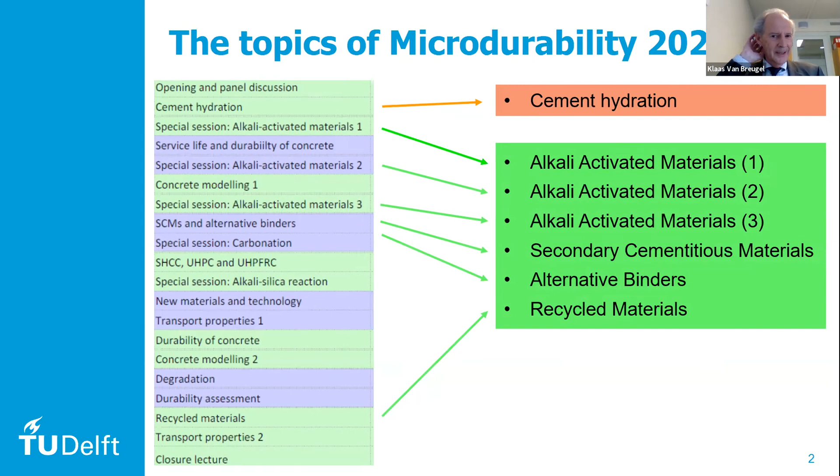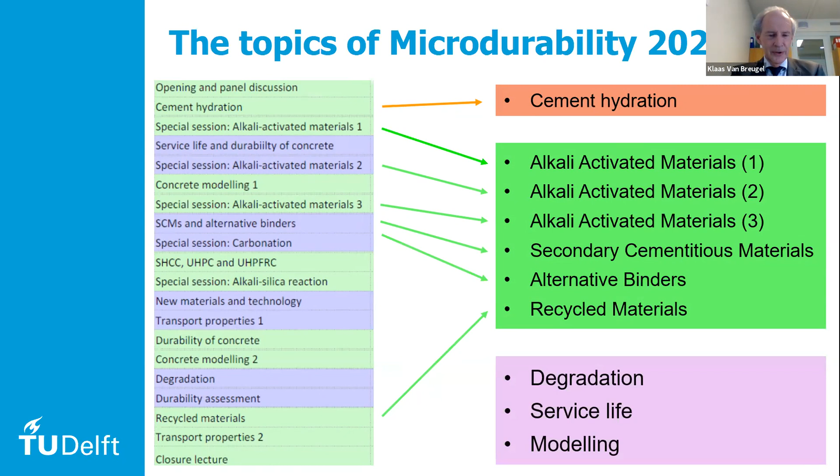I will share some of my thoughts with you, and I hope it will be of meaning for you. Indeed, it's a question: why cement-based materials could make the difference? If I look at the topics of this conference, I have a list of the different sessions, and there is actually only one speaking about cement hydration. Then I see a lot on alkali activated materials, secondary cementitious materials, alternative binders, and recycled materials, and some stuff on degradation, service life, and modeling. So the question is whether there is really some future for cement-based materials, because all the emphasis is on other stuff.

But still, I ask the question: where are we going? Where are we going with all our building materials? I think a realistic speculation about the future should be based on a realistic evaluation of the past. And what did we see when we looked to the past?

Well, the structural materials we used in the past were mud and clay, and they were plentifully available in big quantities. Then we had wood, and another thing about wood is that it is renewable. And then we have, of course, natural stone.

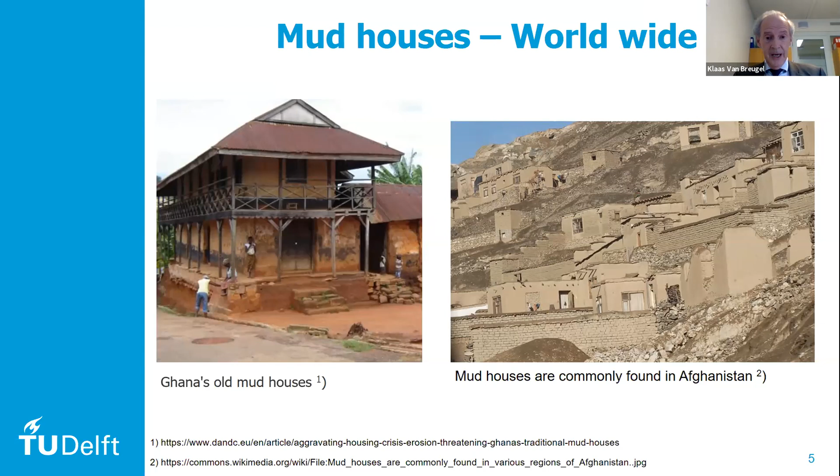Just some images of what has been built in mud, still today — not only houses, but also whole cities, in Afghanistan and also in Yemen and other places. You see many of these mud houses even today, but in the past, of course, even more.

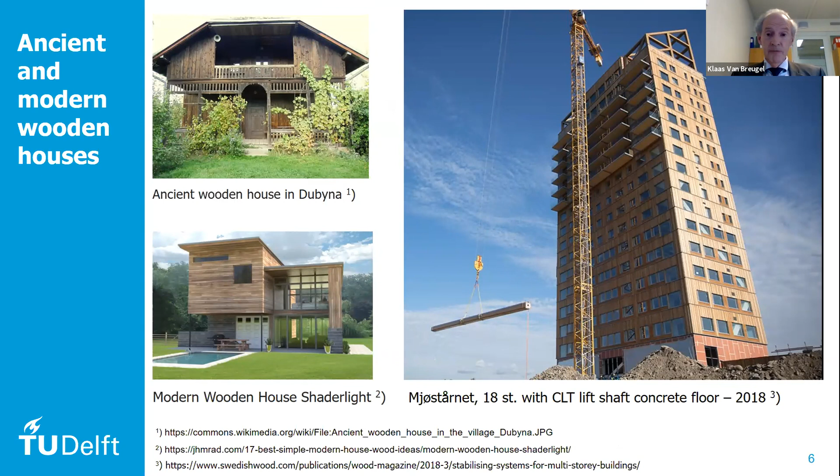Then we have wood, which has also been used for centuries. Very old classical buildings, but also modern buildings, and even multi-story buildings up to 16, 18 stories are built in wood. So wood is nice too.

And then natural stone, with some bridges over 800 years old and even older. So that's what has been possible with these materials.

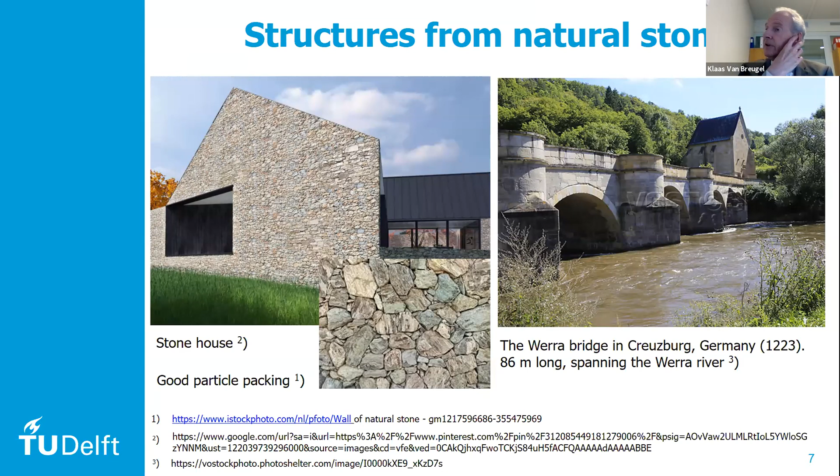And we can say, if we look back, that there was enough for everybody — enough building materials for everybody, and whatever we wanted to build, we could do it. There was enough to meet and realize people's needs and ambitions.

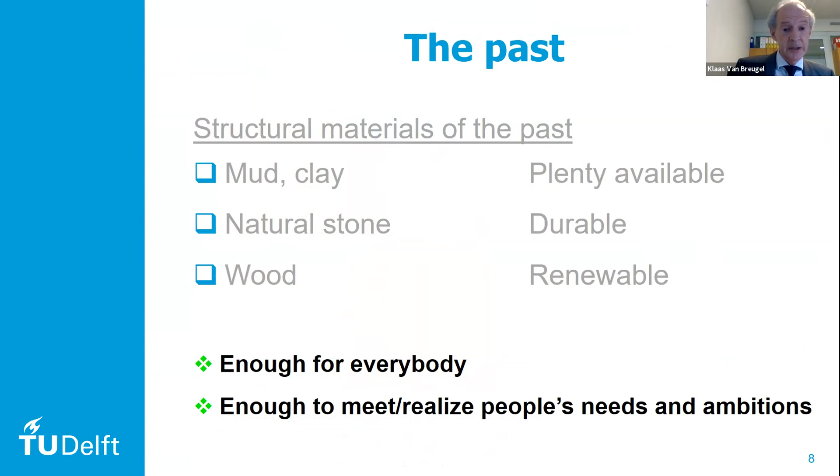But if we look to the future, and even not the far future but where we are today, we see an enormous growth of the population. And we have to wonder whether there is still enough building materials for all those people who want to have houses and to travel and so on.

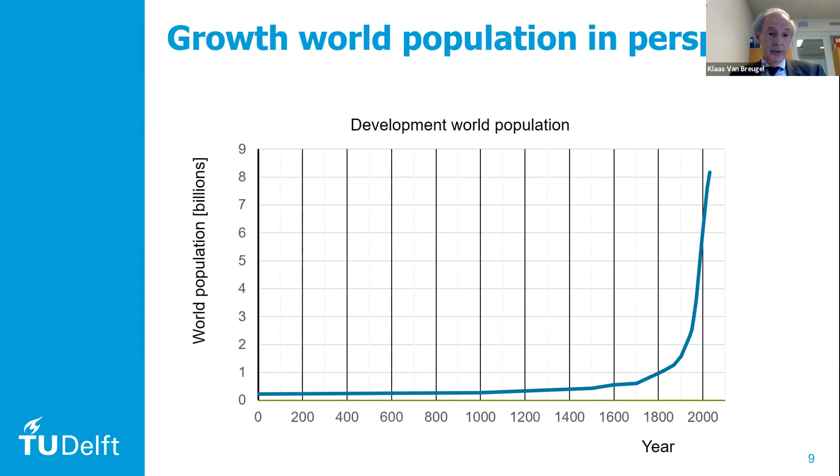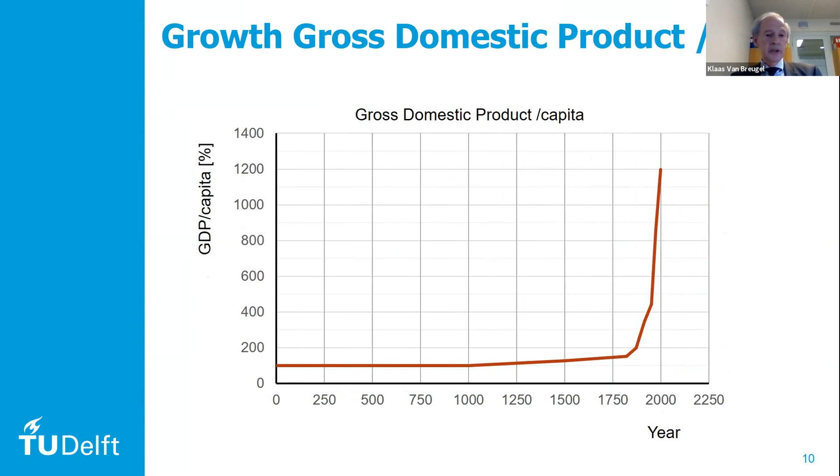It's not only the growth in population, but also the fact that each individual person needs more. There is an enormous increase in the gross domestic product per capita, as you see here. Together, these increases in demand for materials and energy from individuals and from population growth end up in an enormous increase in the world gross domestic product, as you see here.

It's enormous. There is no sign that this will decrease. The need of people, the demand for more materials and more energy, is going on — certainly when we realize that so many people on this planet are still looking forward to higher prosperity and a higher welfare level.

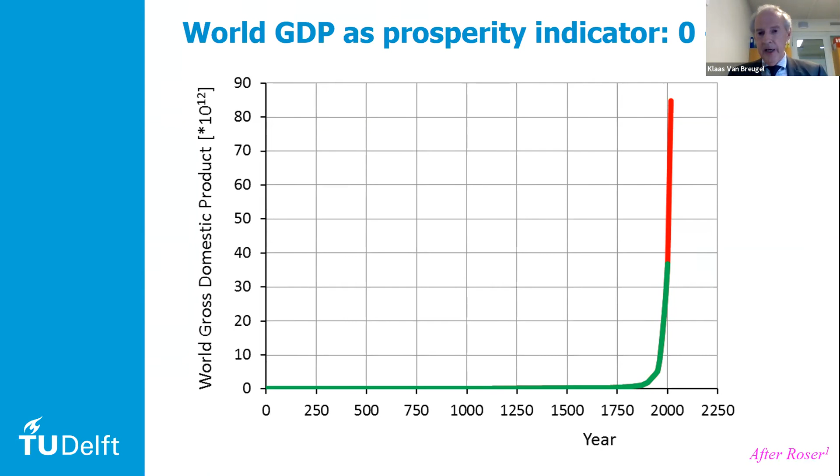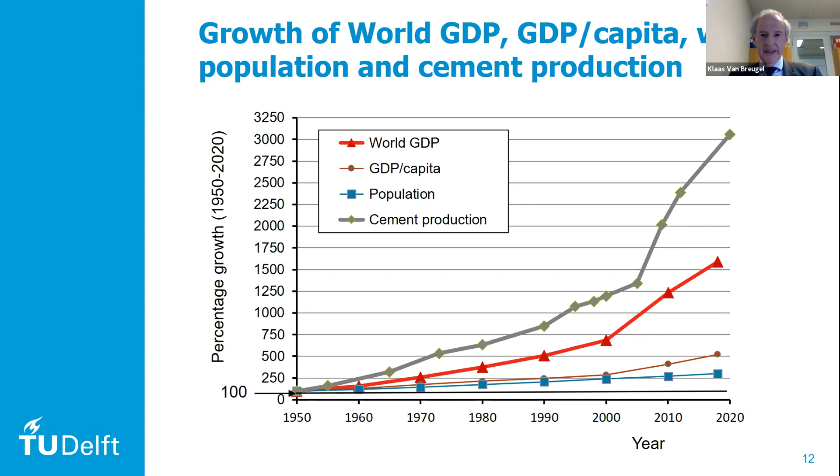Interestingly, this picture shows that cement has played an important role in this. If you look at the red curve, showing the increase in gross domestic product worldwide on a time scale from 1950 to 2020, the last 70 years, you see an enormous growth. The gray curve shows the growth in the amount of cement consumption, and the growth in cement consumption is even higher than the growth in gross domestic product. So we can fairly say that cement and concrete has played a big role in the increase in our present level of welfare and prosperity. The big cities you see here as an example, and also big infrastructure works, have all benefited and were possible because of the use of concrete and cement.

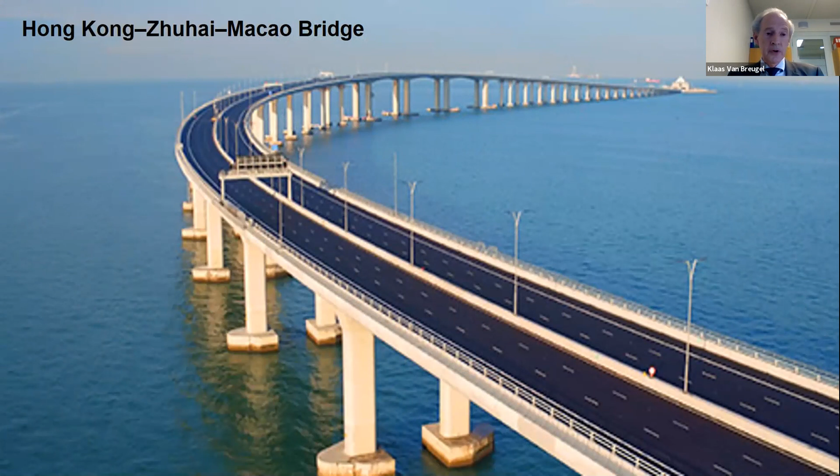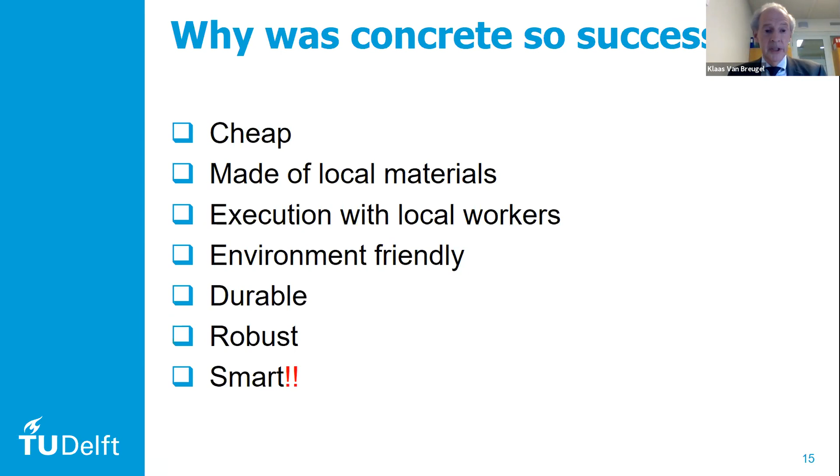And why was concrete so successful? Well, it was successful because it was cheap. It was made of local materials. It could be executed with local workers. It was environment friendly - well, there's some doubt about this CO2 stuff, of course, but it's still a nice material, not seriously polluting the environment. It's durable, it's robust, and above all, it is smart. I will deal with the smartness of the material more in this lecture.

But first, just to show a very nice example of an old structure made in concrete, a type of concrete at least: the well-known Pantheon, often mentioned as one of the precious design works of the past, structural works of the past.

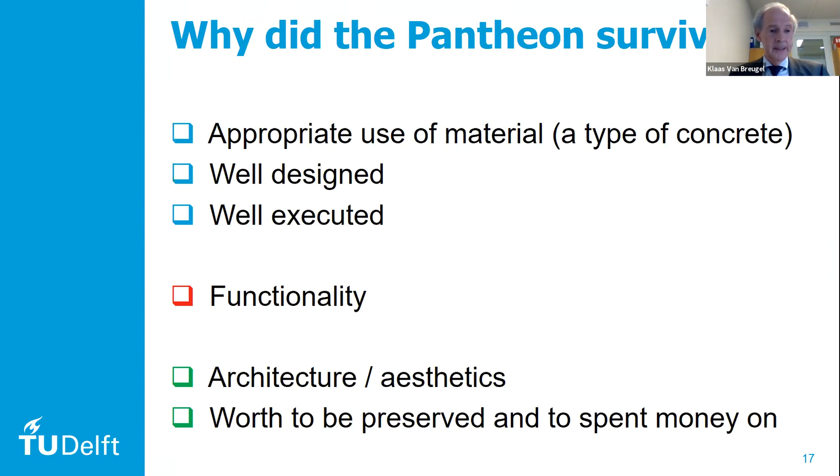And why did this Pantheon survive? Well, it was because of the appropriate use of the material, a cement-based system, kind of concrete. It was very nicely designed, well designed, and very well executed. But apart from that, it was also its functionality - that's also a reason why it is still there, and it's a very beautiful structure. Because it is functional and beautiful, it is also worth preserving and spending money on. So it's not only a materials issue, it is also the architecture of the whole thing that plays a role, and that is considered an important reason to preserve this beautiful structure.

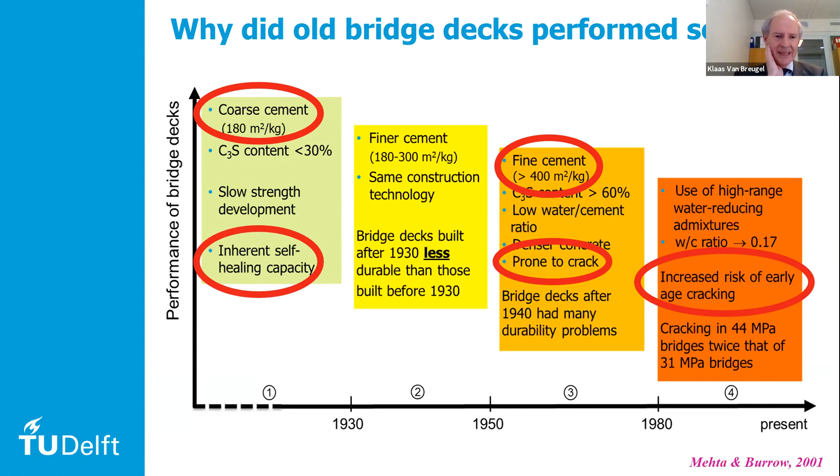If we look back to this first period, those old bridge decks that performed so well, we saw that they had a very good self-healing capacity. And that's one of the secrets, I think, of cement-based materials.

Let's go more in depth into the concrete and what happens when it is loaded. When it is loaded, you see here a piece of concrete loaded, and you see that cracks occur here. The load is transferred from one side of the sample to the other, and it causes cracks because it's a very heterogeneous material with all kinds of stresses in it, tensile stresses, and concrete will then crack. The load is transferred via the aggregates and via the cement paste, and the cracks - still the cracks are there.

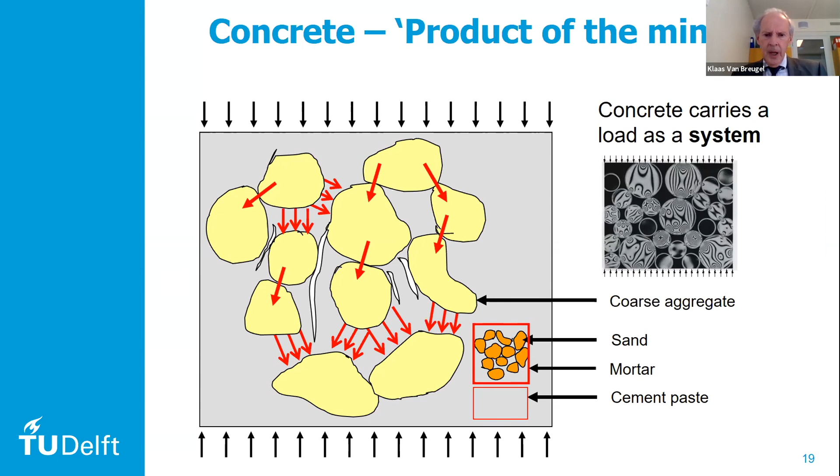How can these cracks occur? Where do they come from? Well, they come from an external load. They come from degradation mechanisms, or they come from an imposed deformation.

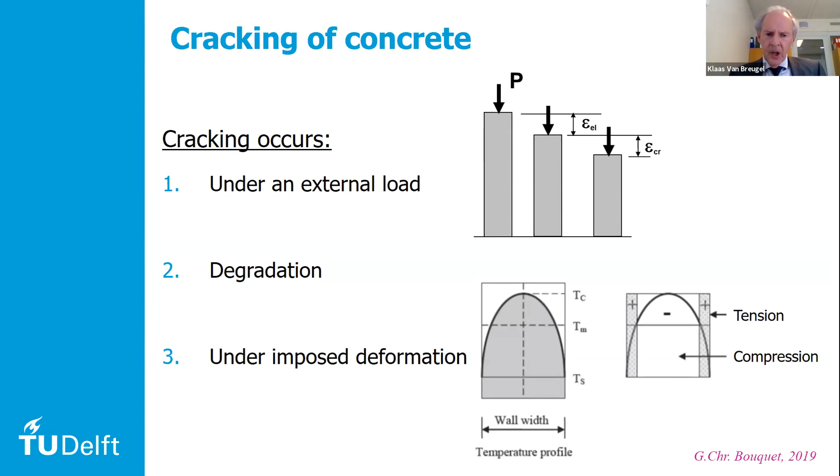Let's look at the first one, a piece of concrete under load. If you have this piece of concrete under load, it is actually a creep test. If you load this specimen, you see an increase of the strain, that is creep, and at a certain time there can be an acceleration of microcracking, and the structure fails.

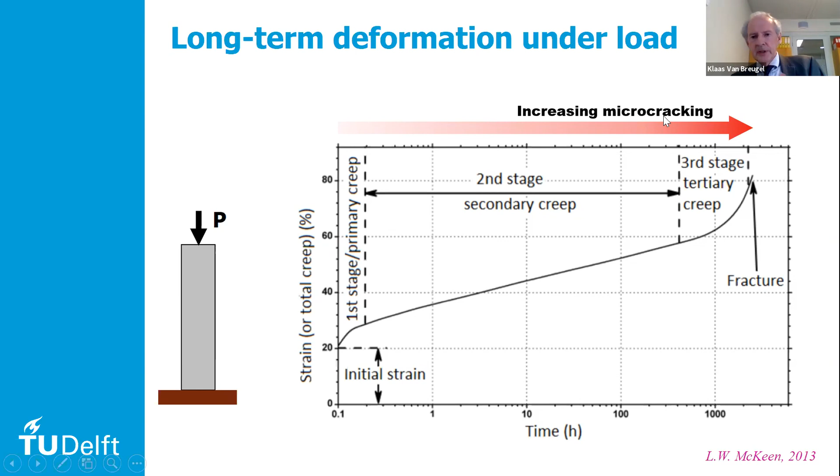So that's due to microcracking under a sustained loading. But we see also something else. Here you see the increased microcracking indicated, but we can also look to the strength, not to the deformation, but to the strength. And then you see that the strength will gradually increase with time due to hydration.

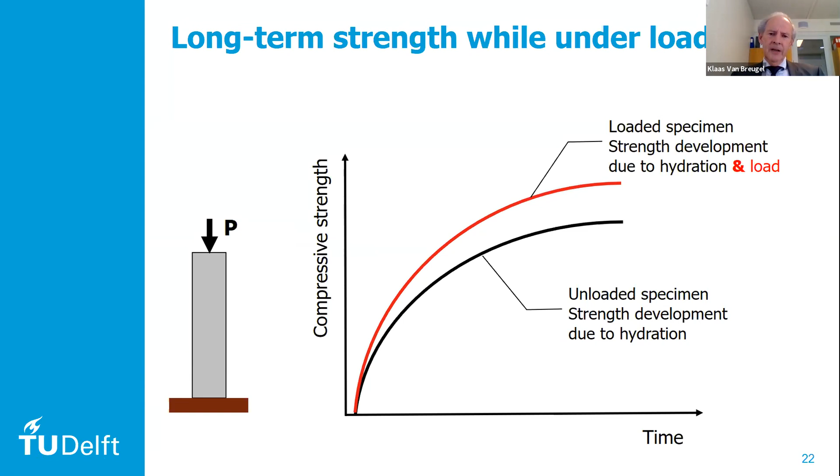But if it hydrates under load, as indicated here on the left cartoon, then you see that in the end the strength is higher. And that's interesting because in the previous picture, we saw that due to cracking, there was in the end failure, progressive failure, sudden failure at the end. And on the other hand, you see an increase in strength. That's very contradictory that a sample that would increase in strength would finally fail. That's a little bit strange, isn't it?

So we see that the ongoing microcracking results in increased microcracking, failure under load, or an increase of compressive strength—an increase of the compressive strength beyond the strength of a sample that was not loaded.

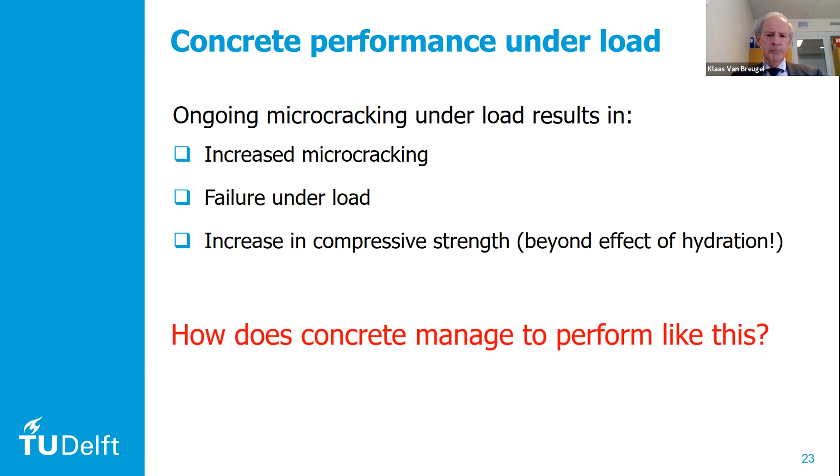So how does concrete manage to perform like this? Well, it is actually self-healing that does that.

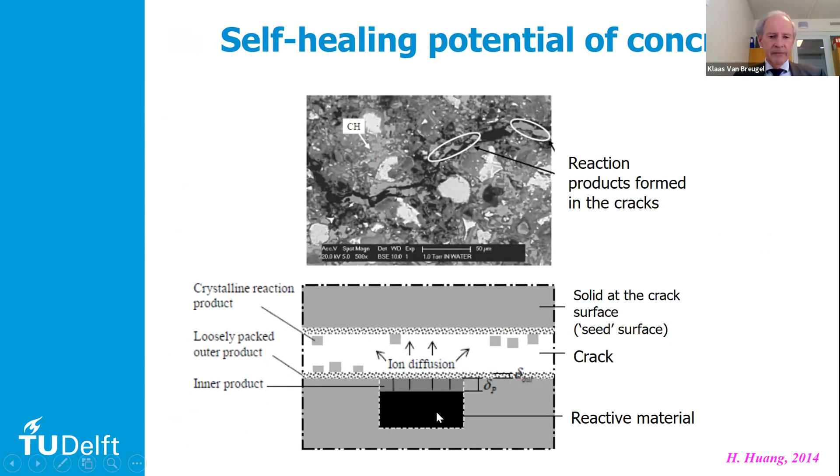The self-healing has been studied by one of our PhD students, Huang, and he has been looking in detail at what is happening in a crack, and he modeled the self-healing that could occur in a crack, that was supposed to occur in a crack.

An interesting thing in his research was that adjacent to a crack, he found that the cement paste was actually densifying due to additional hydration, a degree of hydration that was higher than in the bulk cement paste, a little bit farther away from the crack surface.

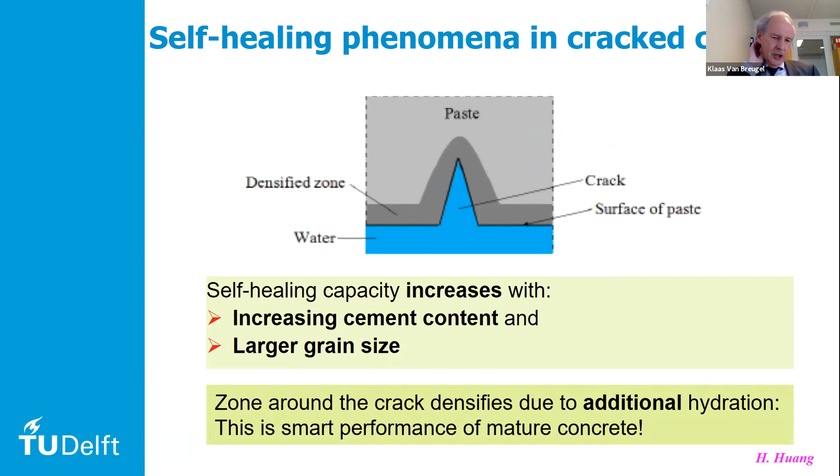Suppose now that this is something that happens always, that close to a crack you have some extra hydration, and we looked at a sample where you have multiple cracking. When a crack occurs, you see a little bit of extra hydration, and another crack, a little bit of extra hydration, and so on and so on.

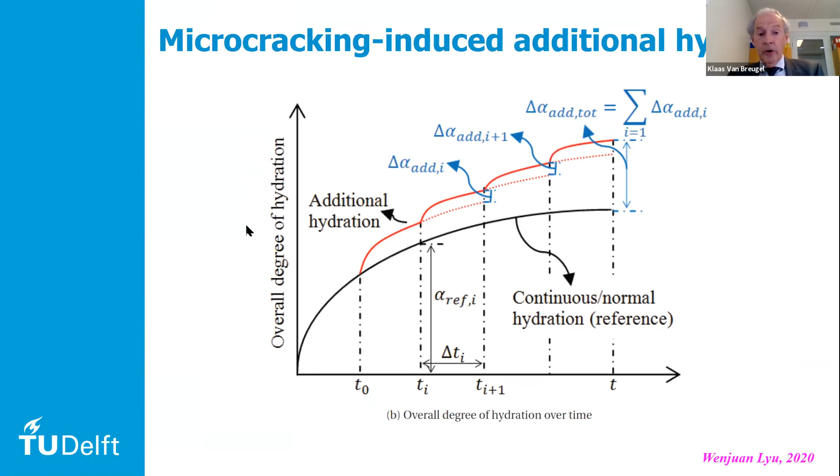So then it might become stronger. We know that there is a good relationship between the degree of hydration alpha and the strength. And if there is extra hydration, then you can expect there will be extra strength.

If not, in the end, the sample will not fail due to this—when you have a very high load level, you may have this progressive collapse as we have seen in the previous one. But at a moderate load level, this might then happen, that you have an increase in strength.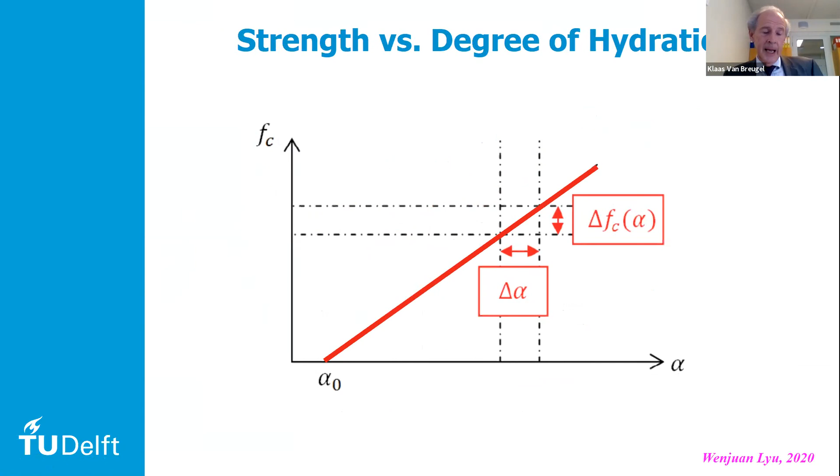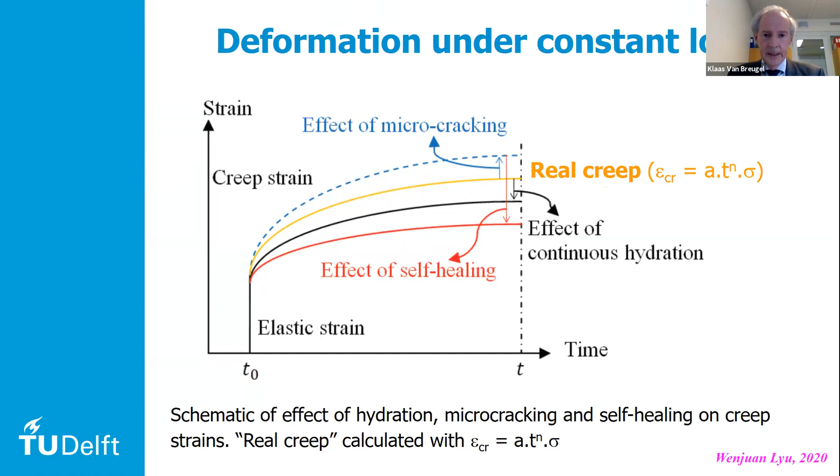So it would be interesting to see whether it works like that and if we can model that. Well, that has been the work of Wenjuan Lyu. She did a study a few years ago. She said, okay, I have here the concrete, on the mesostructure of the concrete.

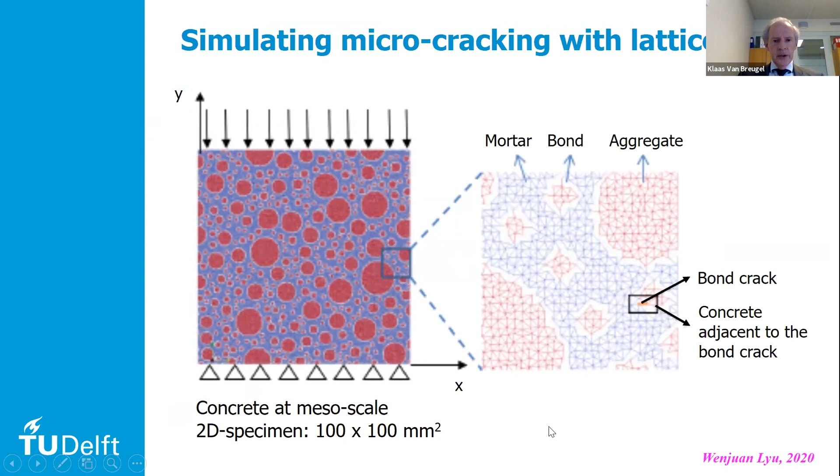I simulate the performance with a lattice model, and I assign to the cement paste the possibility to crack, but also the possibility to self-heal. You see a close-up of what happened around the crack. Here you have the crack. You have here around the crack some strengthening due to additional hydration.

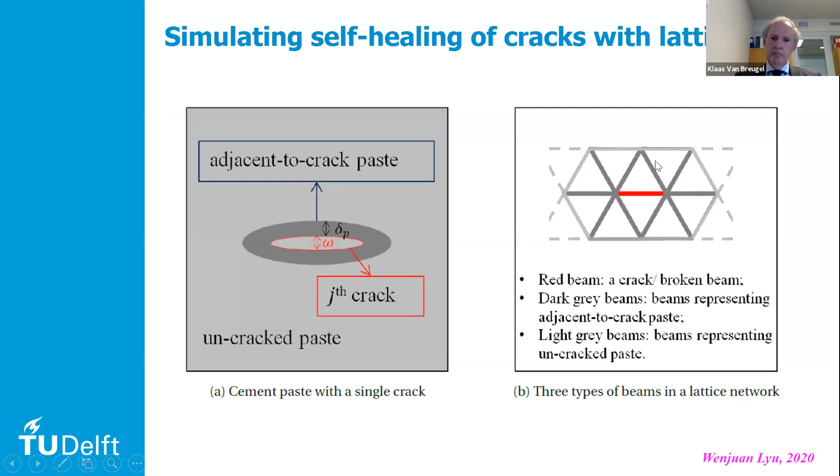So suppose that you have a crack on the left picture, the right cartoon. The crack is indicated with the red lattice beam. Suppose that you are cracked, then the beams around will strengthen due to additional hydration. That's the idea.

This has been put into a model, the lattice model, and she did the calculations on the creep strain of tests over a period of 30 years, simulating tests by Brooks, who did the tests already in 1975. What she found is that if you look at these strain curves, there is one curve with no microcracking, then a curve with microcracking where you have extra creep. And if you take self-healing of the cracks into account, you see a reduction of the creep compared to the calculation with no microcracking.

So you see a trend simulated that is also expected conceptually from the performance of a cracked material: that the cement paste around the crack would experience some additional hydration, giving an overall increase in the strength of the material.

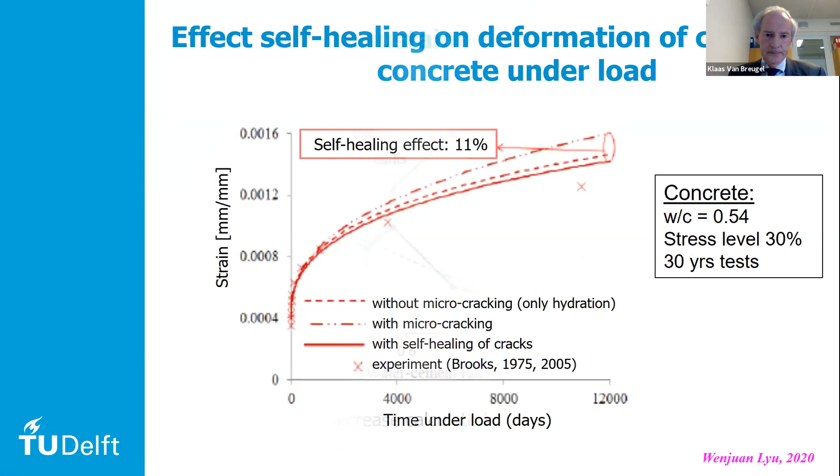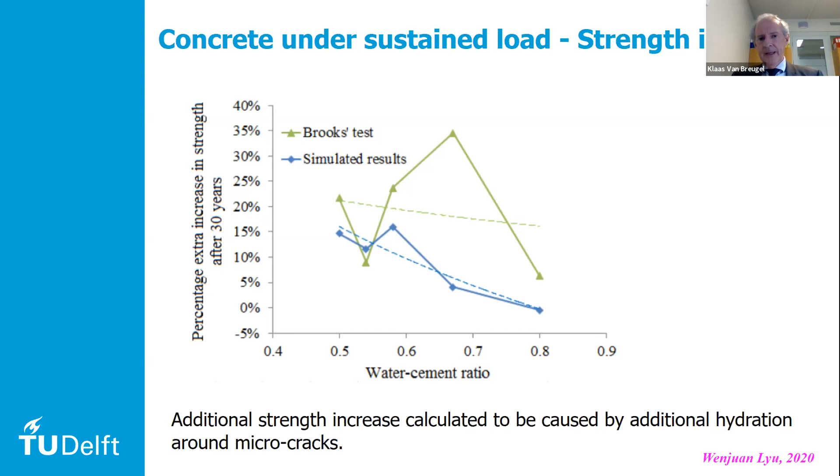So that was nice. What do we learn from this? We learn that, looking at everything said so far, concrete has played a crucial role in economic growth.

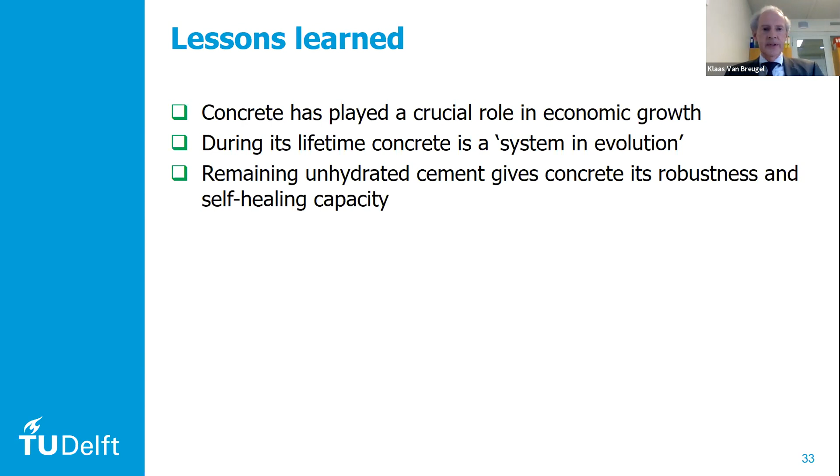We have also seen that concrete during its lifetime is a system in evolution. It is hydrating, it is cracking, the cracks can heal, or if they cannot heal and there is not enough power to heal them, then you have progressive collapse. But during its lifetime it is a system in evolution, and the remaining unhydrated cement gives concrete its robustness and its self-healing capacity.

But so far, nice as it is, the image of concrete is not that positive because of the CO2 issues. I cannot deal with that today, but we all know about it.

We have also seen that there is enormous growth expected, which means an enormous growth in demand for materials. Therefore we foresee shortages in cement and also in sand and aggregate. That's not so often mentioned, but there are many places where there is really a shortage of good sand and good aggregate.

For that reason, there's a trend today to try to use less cement in our concrete, first because of the CO2 issue, secondly because it's expensive, and thirdly because there may not be enough of it. So we reduce the amount of cement in our concrete, but that means we also take away some of the robustness of the concrete.

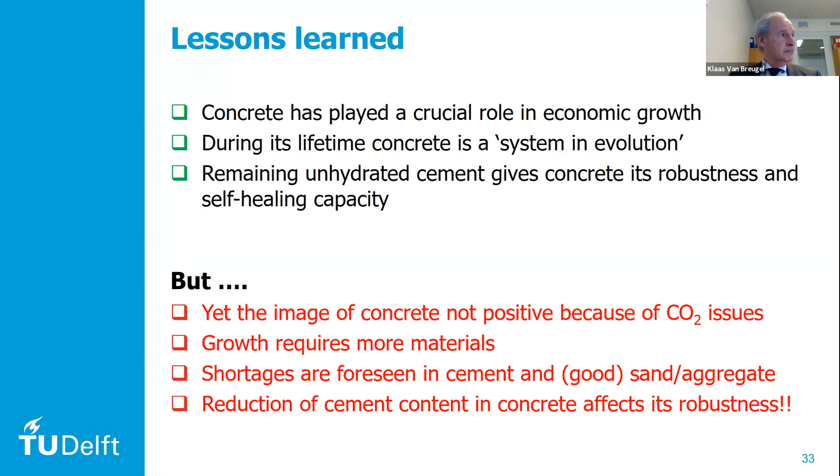If we do that, then we might be smart to introduce artificial healing components, healing potential, into the concrete—for example by using bio-based self-healing concrete, putting bacteria in the concrete that are able to heal cracks once a crack occurs and water becomes available to activate them. You see here an example from our colleague Henk Jonkers, showing the two top pictures: a control concrete that is cracked.

After a test where water is running through the crack, you see that the crack is still there—no healing. But if you have bacteria in the concrete, before the water penetration test there is a crack in the concrete, and after a while, in only a few days, the crack is completely healed, because of the capacity of the bacteria to fill up the cracks with reaction products.

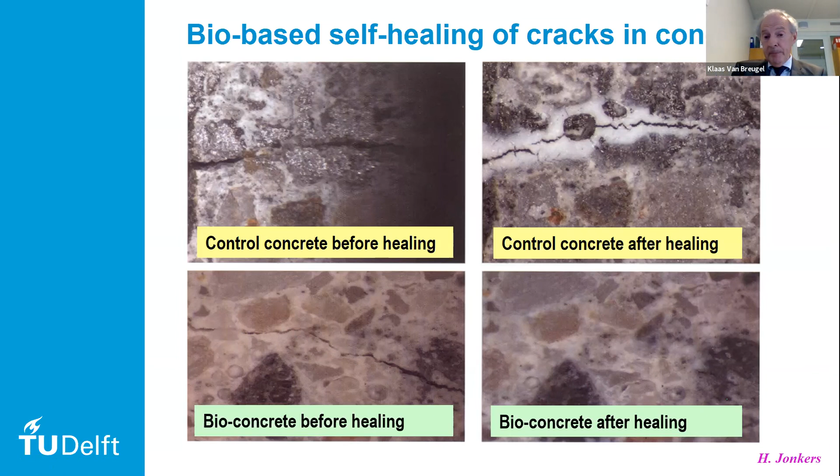Another solution for dealing with our shortage of cement and other components of concrete is recycling. That's a big thing today. We see here how it works—actually not difficult to understand. We have here the raw materials and we have energy; these are the two input parameters and quantities for making materials and structures. And then once structures are there, we have the maintenance period, renovation, demolition, separation, and then back into the circle again.

When we are in a society where we have something to recycle—that is, a mature Western society—their buildings can be used as input. Existing and old buildings that have to be demolished can be used as another source of raw material that can go back into the materials and building cycle.

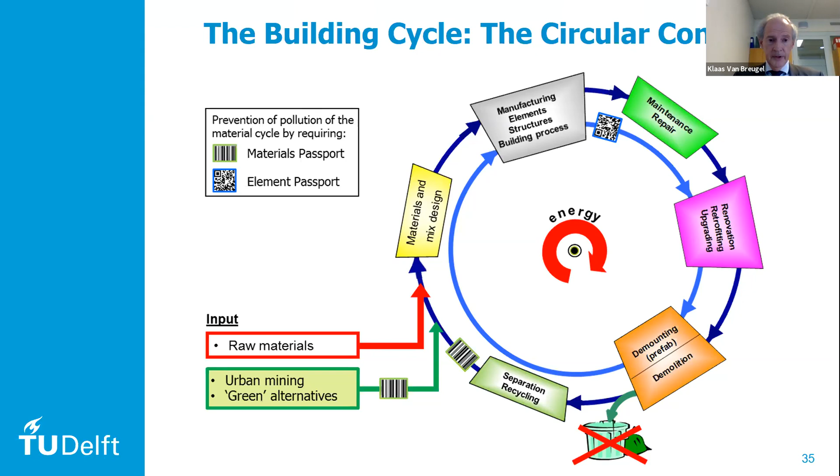This has now been one of the trends that can solve part of the problem of scarcity of building materials. When we look to the future and to the money that will be spent in the building sector in the coming decades, we have to realize that 50% will be spent on preservation or consolidation of our existing building stock, and 50% is needed for growth, particularly growth in developing countries.

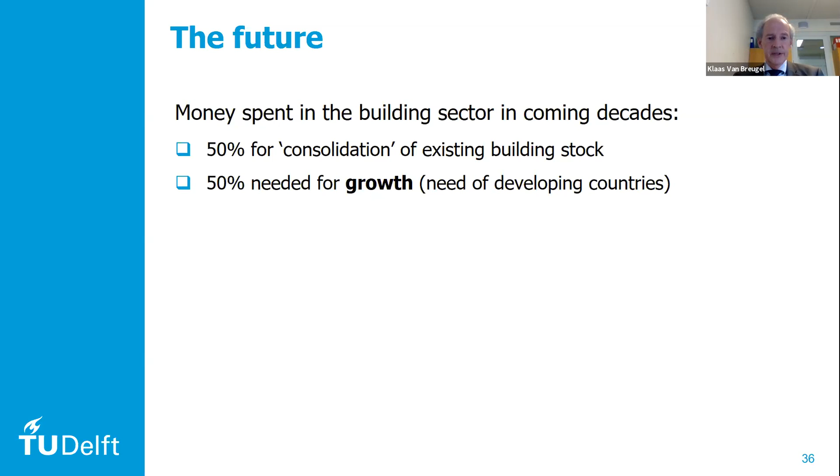If we concentrate on the growth aspect and we are going for sustainable growth, we should realize that recycling is not an option there. When you need growth, there's nothing to recycle yet, because you have to build new. You have to use new building materials, more and alternative building materials, maybe.

To use not too much of these new materials and reduce demand, we should go for smart design, use less materials, and 3D printing is certainly one of the options to use less material. And go for a long service life, which will reduce replacement costs. You can realize this long service life with some built-in self-healing capacity, which makes the structures more robust and reduces maintenance cost.

But even more than that, I think we have to reconsider our needs and ambitions. Because if our ambitions are growing sky high, as we have seen in one of the first pictures, it will be impossible for any material to meet that high demand.

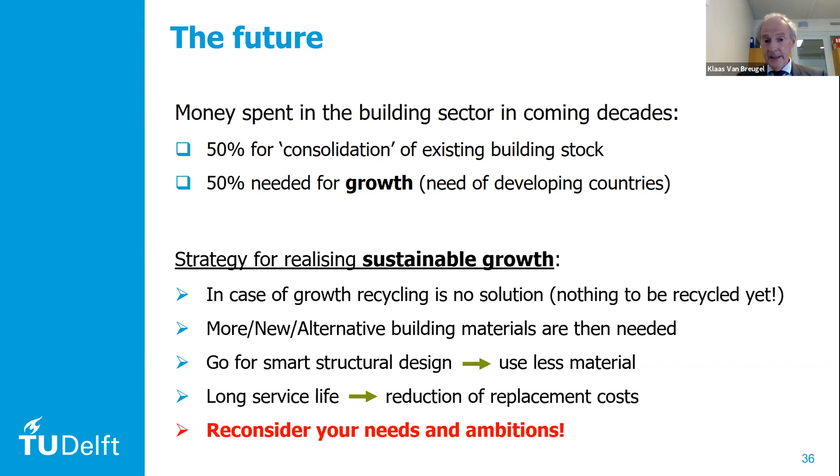In conclusion, concrete can make a difference because it has proven to be able to make a difference in the past. It is highly recyclable, and thus can reduce the need for new materials. Concrete can be designed as a smart system, robust, with which structures can be built with a very long service life.

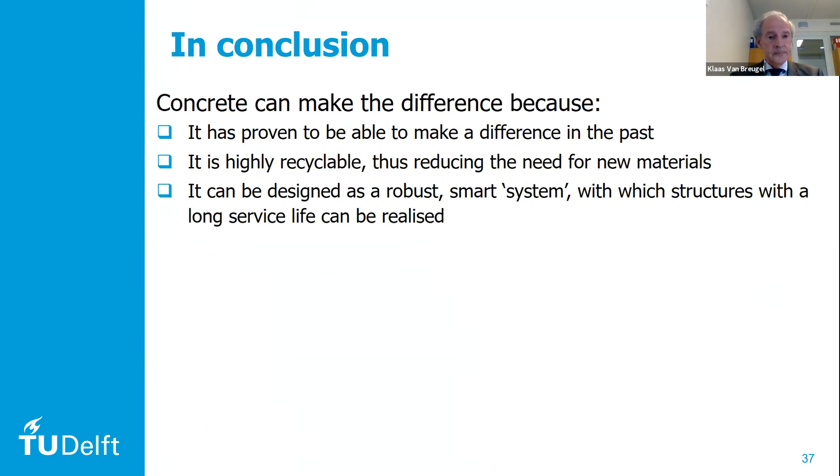But more importantly, in view of sustainable development, sustainability is more than just using smart materials. Think about the Pantheon, where functionality and architecture also play a role. That also determines whether something is worth spending money on and preserving.

The purpose of growth is not growth, but should be maturity. That's what we learn from nature. Nature teaches us that growth beyond maturity is rather a disease than progress. And that brings us to the final thing: defining the mature society is one of the biggest challenges ahead.

If a society is only going for growth, with no notion of what maturity should be, then there is no end in this vertical curve that is going nowhere - a vertical curve representing increasing growth but also increasing consumption, and that is not sustainable in the end.

Well, those are my thoughts that I wanted to share with you. I see that I'm a little bit over time, so it's time for me to stop here. Thanks for your attention.

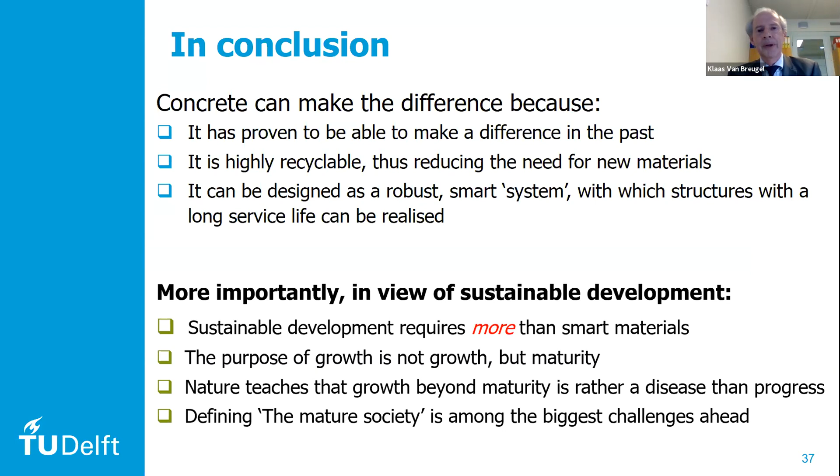You said that circular economy is becoming very important, that we want to reuse elements and recycle materials because our structures are aging, and probably there's degradation of the structures, and then we want to recycle them. But if we have degradation, they're also probably contaminated, the materials. So if we crush them and make new concrete, probably the quality will be less because the materials are contaminated. Is there then even more need to design for self-healing, so that we can make them better for their next life? Is that something that will be more needed?

Yeah, I think that's true. Well, I went very quickly through that slide showing this recycling, and I didn't mention - let me try to find my presentation back. How do I do that? Yeah, here.

If you look at this presentation, you see I did not mention that we have here also a materials passport and an element passport. The material passport focuses on a procedure that is absolutely needed for taking up new materials in the building cycle, because if they do not meet certain criteria, they might pollute the material cycle. So we have to be very careful accommodating and mixing material streams, because they can result in a cocktail of materials which are not compatible and can do worse than solving a problem.

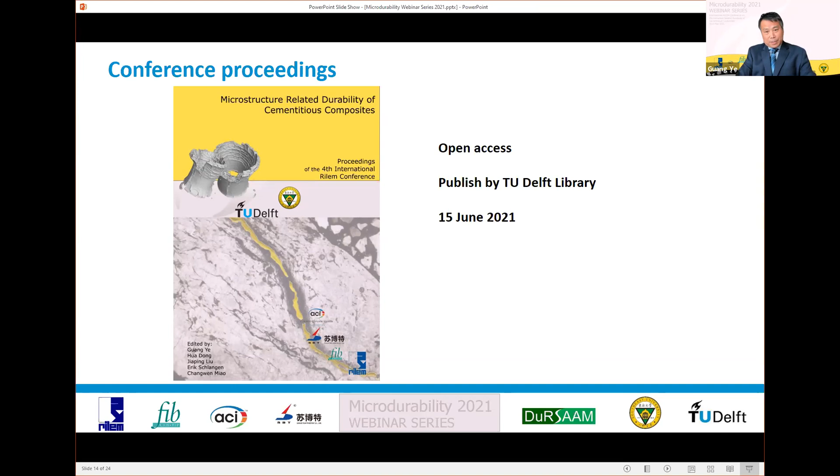It is fair to say the Microdurability conference was a big success. In this special COVID-19 pandemic period, so many people have contributed in so many ways to turn this event into a smoothly running webinar series.

First of all, I would like to thank our scientific committee for reviewing the papers, chairing sessions, leading active discussions, and selecting the best students' presentations. Their valuable efforts ensured high quality presentations and high scientific quality of this conference.

My great appreciation goes to the keynote speakers for taking time out of their busy schedules to deliver excellent keynote lectures with great scientific value at the pre-conference webinar last October, and for joining the panel discussion to share their views on microstructure-related durability and further research in construction materials.

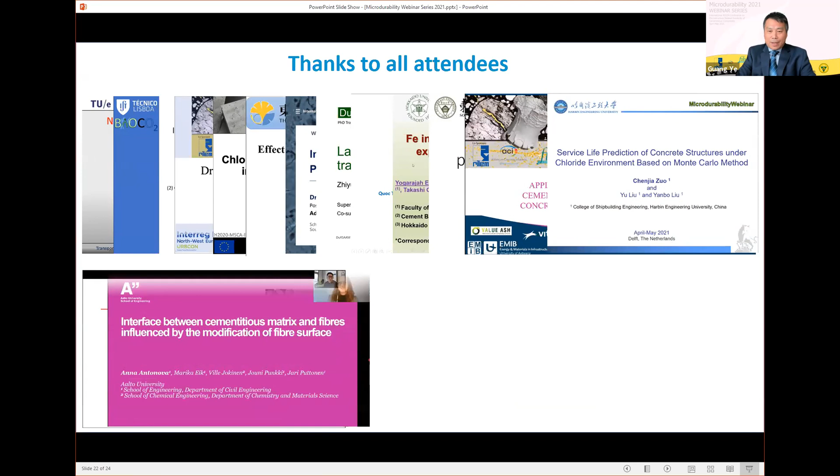Last but not least, I would like to thank all attendees. You have spent your valuable time and effort to prepare high-quality presentation videos and submit them on time. We would like to thank you all for your great scientific input and for many fruitful discussions and scientific interactions. Without your attendance, the Microdurability conference would not be possible.

Excuse me, I cannot list all presentations here. In the end, hopefully we can meet each other in person very soon, and I wish you good health and to stay safe.

In the end, I would like to close my remarks and officially announce the end of the Microdurability Conference webinar. Thank you very much.